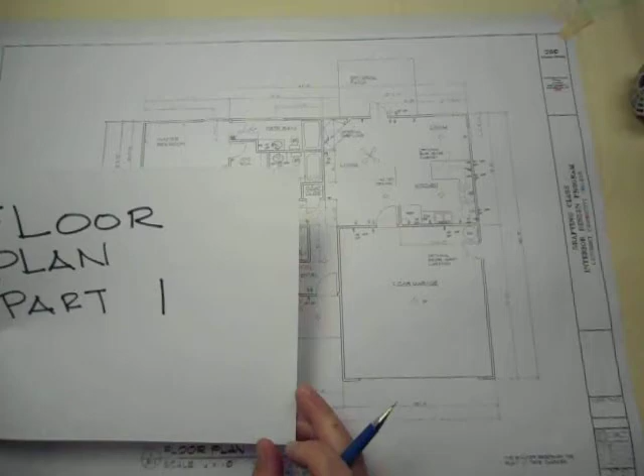Alright, welcome back. We're going to start today our semester-long drafting project, floor plan part 1, and we'll be going over this. As you remember, everybody was given a little 11 by 17 handout of the floor plan, with some elevations, schedules, and a wall section. That's what we're going to be working on this semester.

Now what you need today is this floor plan 11 by 17 sheet that I gave you, so you can use it as a guide to draw it. But you're going to be drawing it on 18 by 24 paper at a quarter scale. Don't try to scale too much off of this 11 by 17 because it's been reduced, and you'll get bad results.

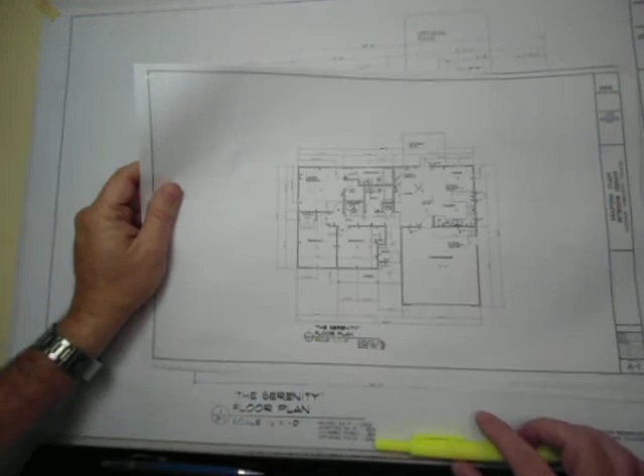But you can see all the dimensions that you need are already pre-programmed in there for you, so it should be pretty easy. So what tools are you going to need today? You're going to need your T-square, a pencil, paper, a triangle of some kind, and your scale. You probably have a triangular scale, something like that.

Now we're going to do this initially as a draft layout of the plan on just regular bond paper, which we have. I'll give you some sheets of that to work on, and then as you get a little bit closer and work the bugs out, we'll put your vellum on top of it and trace it, so you hand in a nice clean project at the end, so it won't be all smudgy.

So you get a chance to work through some smudges today as we go through this part by part. I'm going to take you line by line through this, and then we will take a break and go on to part 2 a little later.

So what I want you to do is go ahead and tape your paper down, tape it square, so you'll need your T-square or some other mechanism to keep it square. Tape down the corners, and then we'll start drawing. Take a pencil, and feel free to do this lightly because you're going to be doing some erasing to cut into doors and windows and stuff like that. We're going to trace it at the end with a little darker on your vellum. Again, this is on scrap paper or draft paper, so we're not wasting the expensive stuff.

So what I want you to do, and we've all learned how to use a scale by now, we all have learned how to use a pencil, and we all have learned how to use the triangle by now. So that's what you need to do.

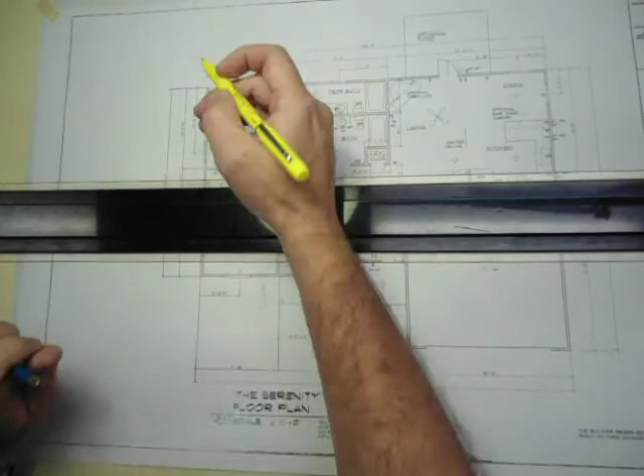We're going to start very simply by going up here to the top of the page. Just disregard this optional patio for the time being. You're going to start by drawing the perimeter walls, and you need to look at how it's laid out on the sheet. You don't want it all slammed over to one side and end up running out of room, where you can't dimension it. So we're going to start right here, as you see in the upper left hand corner of your drawing, and try to draw from there and come down so we smudge it the least.

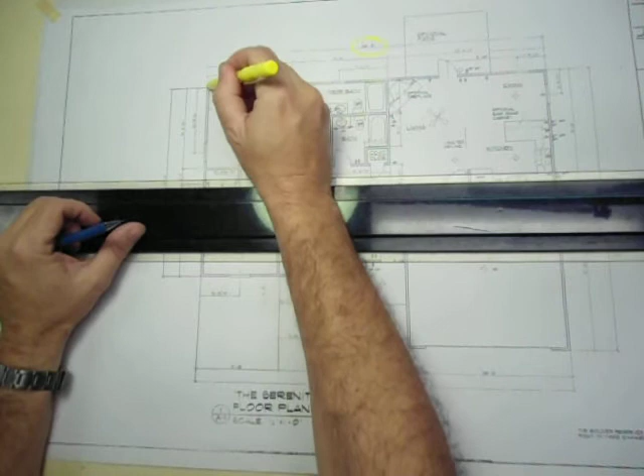So that top line of your floor plan there is 50 feet long. You see that? So I want you to go ahead and draw that line across there. Don't worry about windows and doors now. Just go ahead and draw a line that is 50 feet long with your T-square and your pencil, and go ahead and do that.

As you catch up with that, you can pause this before we start the next lines. We're going to go ahead and get the perimeter of the building, and then we're going to work to the inside.

Next, from that point where you just stopped, you want to come down and draw a line on the outside of your floor plan all the way down that is 40 foot long, and that becomes the front edge of your garage at that point.

And then go ahead and let's draw right across the front of the garage, which is 20 feet 8 inches. Remember, we're drawing at a quarter-inch scale here. Don't worry about the door again, just draw a line all the way across and get to that corner, which is 20 feet 8 inches from that corner to that corner.

Now it gets a little bit more complicated at this point, so we're going to jump over back to our starting point so that we don't have to do too much math and figure out where that indentation is.

I want you to come back up here to where you started from, and draw a line 30 feet straight down to that corner right there. That's 30 feet long from where you started down, and that gets those outside bedroom walls that you see there on your drawing.

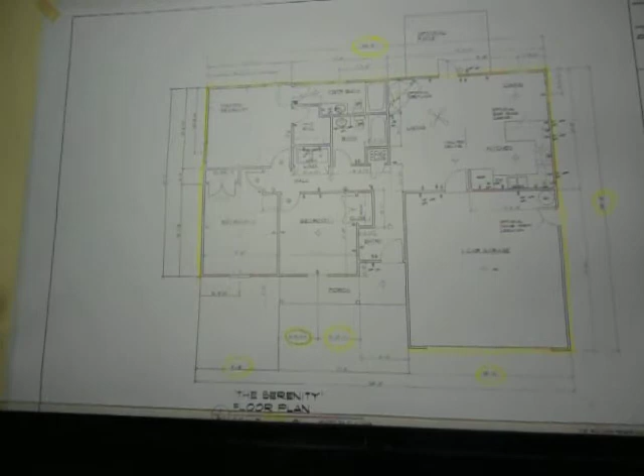You want to add, this is part of the exercise, 11 foot 8, 5 foot 5 3/4, and 5 foot 10 1/4, and you should be able to add that up fairly simple. You need to do that and make sure you've drawn it in the correct fashion. I'm not going to give you the answer, because it will tell on you if you've made a mistake. Double check again: 11 foot 8 plus 5 feet 5 3/4 inches and 5 feet 10 1/4 inches, and that's what you want to draw.

The total of that length you want to draw all the way across here to the corner of that porch, right there. Then you want to go up the space 2 feet and catch the front edge of that porch, and then come across 6 feet 4 inches for that front entry wall.

And from where you ended right there, it should be a matter of connecting those lines together. Take your time and really try to do this as accurate as you can, so that closure point is as close as possible.

Now the very next thing we want you to do is the exact same thing around the perimeter, but we want to draw the inside portion of that wall.

And again, remember, we're drawing 2x4 inch walls, and 2x4s are not 2 inches by 4 inches. They are 3.5 inches and 1.5 inches, so that's 1.5 by 3.5 really. But in reality, you can't draw that close a detail at quarter scale, so you can use the 4-inch measurement, but your math should work to 3.5 inches.

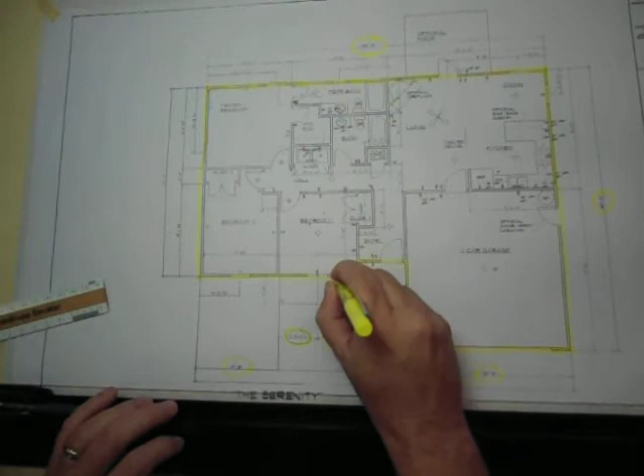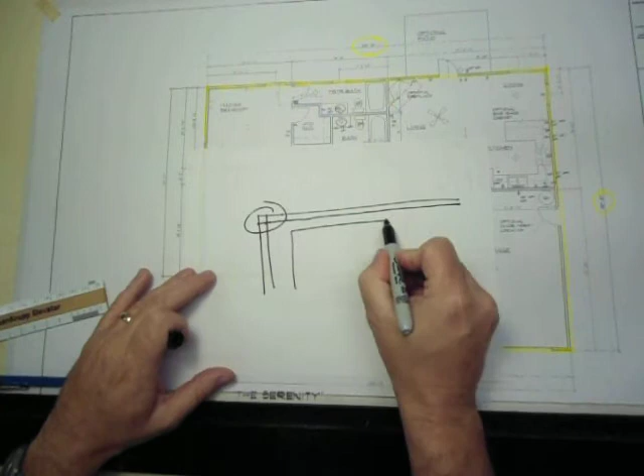Now you're going to come down that 40 feet, but we're going to trim out the inside corners. Again, you're still 3.5 inches off of that first line you drew, and you come all the way around the perimeter, 3.5 inches off, until you close back up in that corner. Now, what you just drew probably looks more like where those lines cross. In reality, what you want is for it to actually turn the corner - they can overlap just a little bit, but they shouldn't go all the way through, or you can exactly turn the corners, which is probably the way your drawing shows you.

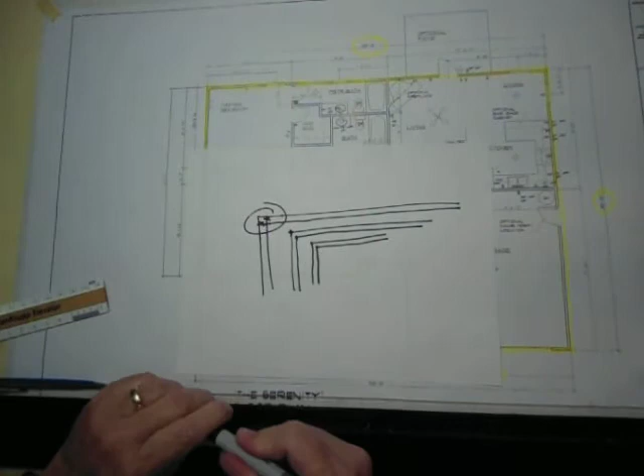But it was drawn with a computer, so it can be a little bit more accurate. You can erase out those little pieces that overlap with your eraser, and you'll have nice clean lines at that point.

At this point, you should have the exterior walls defined - again, not counting doors or windows. We're going to come back and do that all in one swoop. So you should look at it and gauge yourself and see if you've gotten the exterior walls where you want them to be.

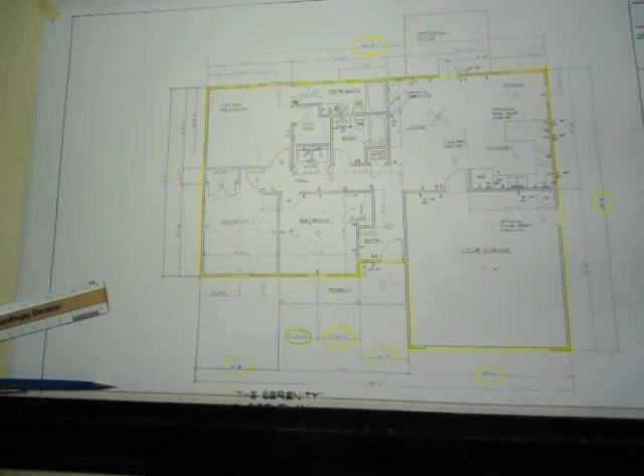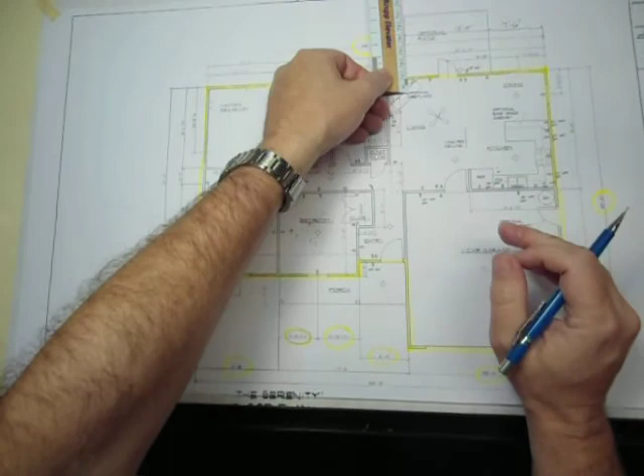Let's go ahead while we're still working on the outside, and draw this optional patio in, which in this case is just a concrete patio, so it's just a single line. I'm measuring this because I can, but you can't from yours. From that line over from the edge of the building is 7 feet 6 inches, and then that patio is going to be 12 feet wide, and then it's going to come out 10 feet.

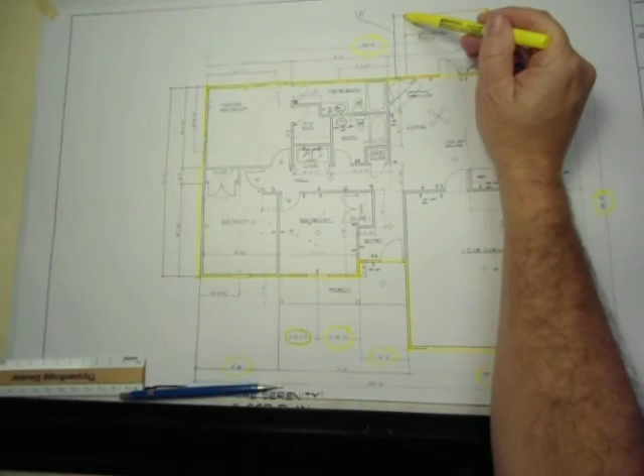So come from this upper right hand corner of your building, measure over that 7 feet 6 inches to this point, and then draw a single line straight up that is 10 feet long to this corner - from there to there is 10 feet. Then draw from here over to this corner a dimension of 12 feet long, and then it's just a matter of taking that line and drawing it down with your triangle, straight down to a point that it intersects the exterior perimeter of your building.

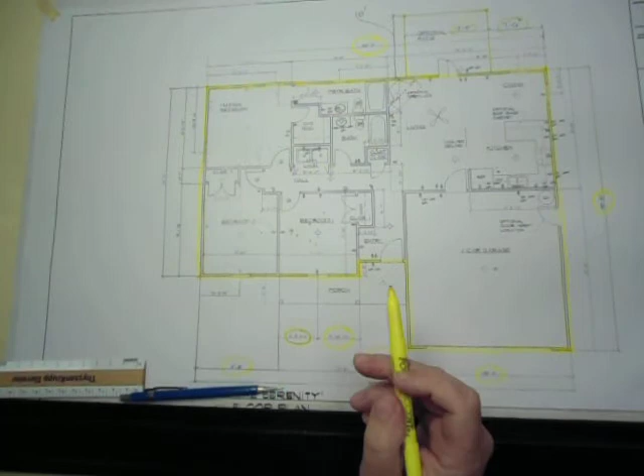Take a minute and gauge where you're at. We're going to be starting the interior of your plan in just a second in part 2, and part 2 will get more into the interior portions of this plan. So just take a minute and double check all your dimensions around the perimeter and see if they do add up and close out like you want them to, and that you haven't made a mistake.

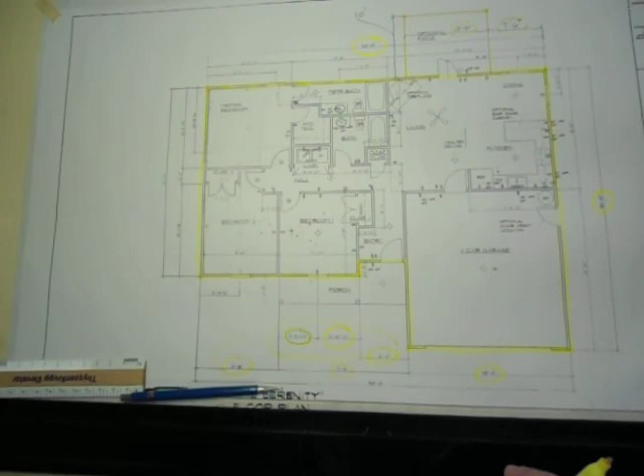Probably a place to double check is these dimensions that you are adding to this dimension to get that line. Double check everything before we start our interior, because if our outside is wrong, it's definitely going to compound on the inside and cause an error you don't want to go back and start all over from. So at this point we're going to take a little break, and you're going to double check all your dimensions, then come back and we'll start part 2, the interior portion of this floor plan. So we're going to take a little break.